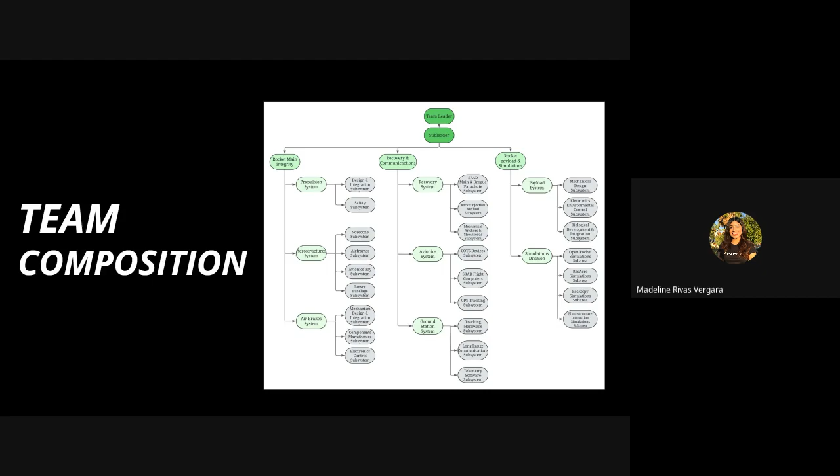Now I'm going to talk about team composition. First, team leader, followed by sub-leader, Miley. Our team is composed of three principal divisions: rocket main integrity, rocket recovery and communications, and simulations and payload.

Each division has three areas. Rocket main integrity has propulsion system, aerostructure system, and air brakes system. Recovery and communications has recovery system, avionics system, and ground station system. Finally, simulations and payload has payload system and simulations division. Each one has their own subdivisions. Next slide, please.

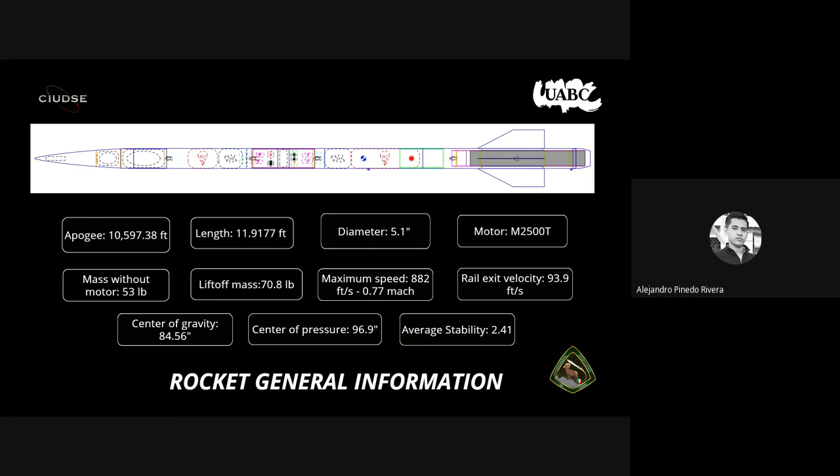There is some general data about our rocket, like the apogee, length, diameter, motor, mass without motor, liftoff mass, maximum speed, rail exit velocity, center of gravity, center of pressure, and average stability. This is the level of stability—I made a mistake. If you have any questions, Jimmy, you can tell me at any moment. Next, please.

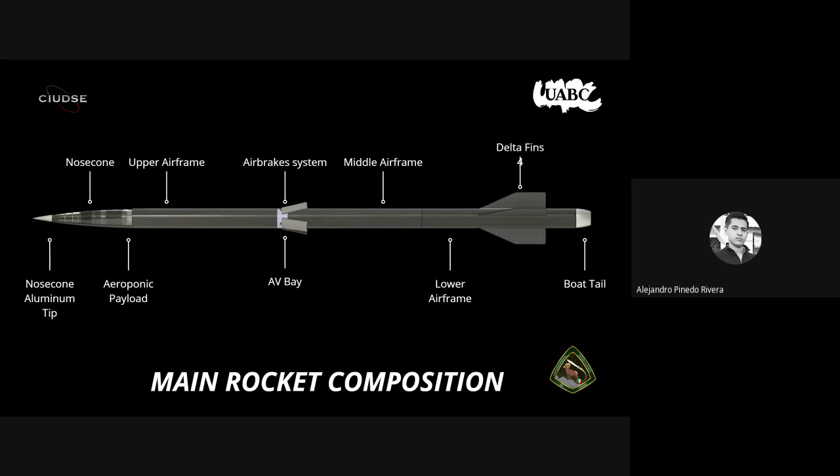We have the main rocket composition. First we start with an aluminum tip, followed by nose cone, the payload, the upper airframe, the airbrake system, the avionics bay, the middle airframe, lower airframe, our fin configuration, and finally the boat tail. Next, please.

Now we move on to the nose cone. Good afternoon, my name is Anna, and I'm the nose cone leader. Next slide, please.

Some general specifications of the nose cone: our rocket's nose cone has two functions. The first is to serve as an aerodynamic enclosure that holds the air during forward motion. Its secondary function is to serve as a compartment for the payload, protecting and storing it. Its mission is to endure aerodynamic forces during flight, and its type is an LD Haack ogive.

Next slide, please. The nose cone has 6 components, starting with the tip, made of aluminum 6061-T6 with an M36x4 thread. Inside we have the tip coupler, also aluminum 6061-T6, with an M36x4 thread on the interior. Then we continue with the nose cone structure, which is a composite lamination of carbon fiber and fiberglass.

We continue with the shoulder, which is exclusively fiberglass. Then we proceed with the bulkplate, made of aluminum 6061-T6, half an inch thick. We use 6 M4x0.7 fasteners, and finally we have the half-inch eye bolt.

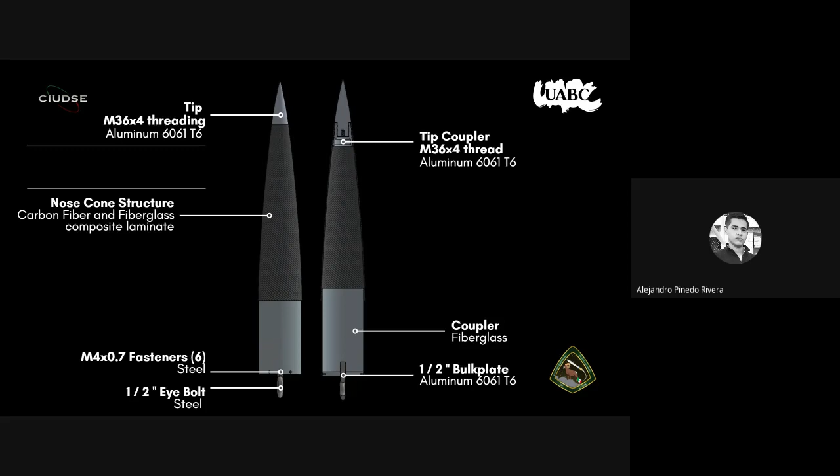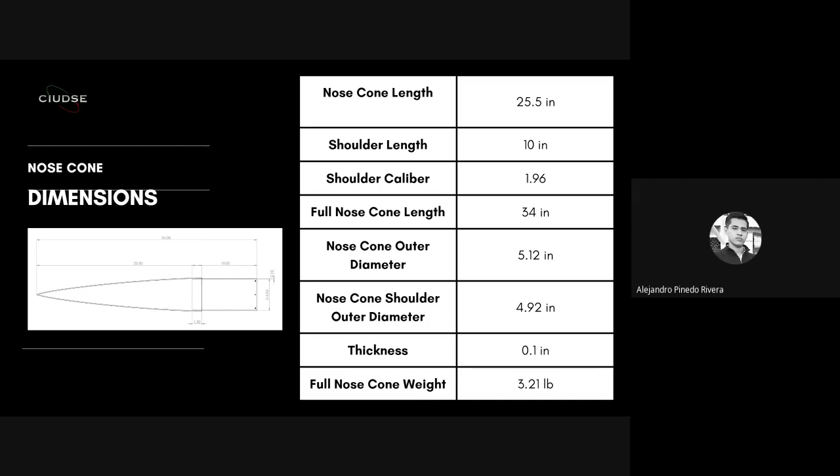Next slide, please. For the dimensions, we have a nose cone length of 25.5 inches and a shoulder length of 10 inches. However, out of those 10 inches, 1.5 inches of the shoulder length goes inside of the nose cone. In total we have a 34-inch length. The shoulder caliber is 1.96.

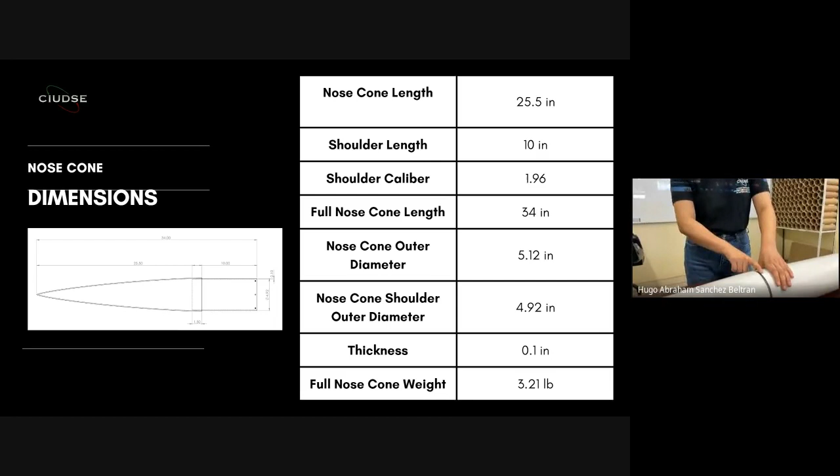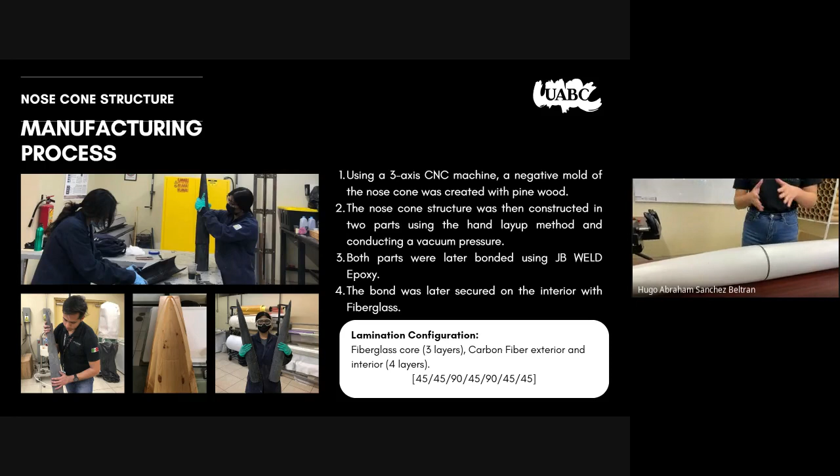Next slide, please. For the manufacturing process of the nose cone structure, we use a 3-axis CNC machine to create a mold with pine wood. Once we had the mold, we proceeded with the construction of the structure using the hand layup method and performing a vacuum process. Once we obtained both parts of the nose cone structure, we used a JB Weld epoxy to join the parts, and finally we used 1 layer of fiberglass to join both parts. For the nose cone area, this will be it.

Thank you. Okay, hi, good afternoon, my name is Leonardo. I am the leader of the airframes. I will tell you the important aspects of each one.

Our rocket is made up of the upper, middle, and lower airframes. The next 3 airframes have the same measurements: 5.12 inches outer diameter, 4.92 inches inner diameter, 0.098 inches thickness. In a moment I will mention the length and weight of the airframes. I'll start with the upper airframe: 37 inches length and approximately 3.84 pounds weight.

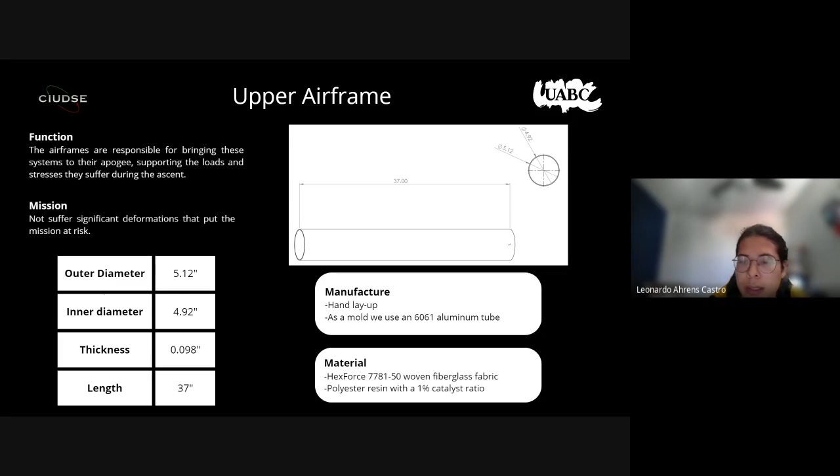HexForce 7781-50 woven fiberglass fabric is used to manufacture the upper part of the airframes. This fiber was chosen due to the need to not interfere with the avionics communication with the ground station during flight, as carbon fiber would do. We chose to use polyester resin with a proportion of 1% catalyst for our structure. The manufacturing technique for this component is hand layup. Next slide, please.

The second airframe is the middle, bound at 34.25 inches length and approximately 3.55 pounds weight. Carbon fiber filament and epoxy resin were used due to their excellent mechanical properties.

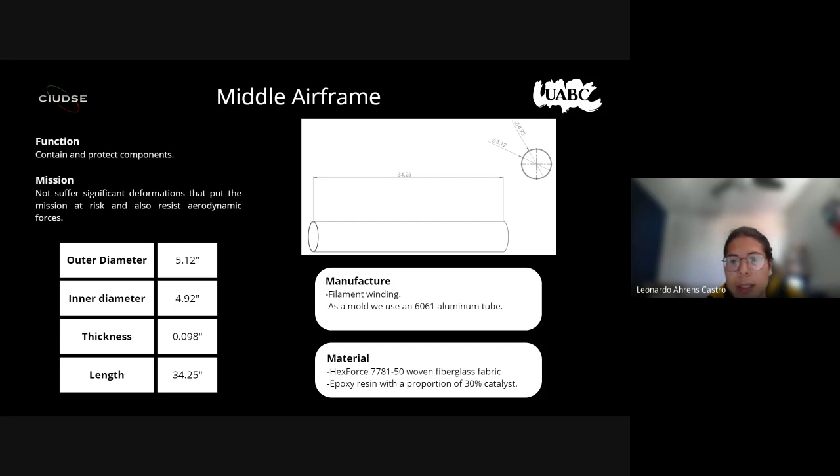Next slide please. On this occasion, we decided to implement a new manufacturing method called filament winding. Filament winding is a manufacturing technique for creating composite material structures. The process consists of winding a tensioned filament impregnated with resin around a cylindrical mold. This new manufacturing method was used to make both the middle airframe and the lower airframe.

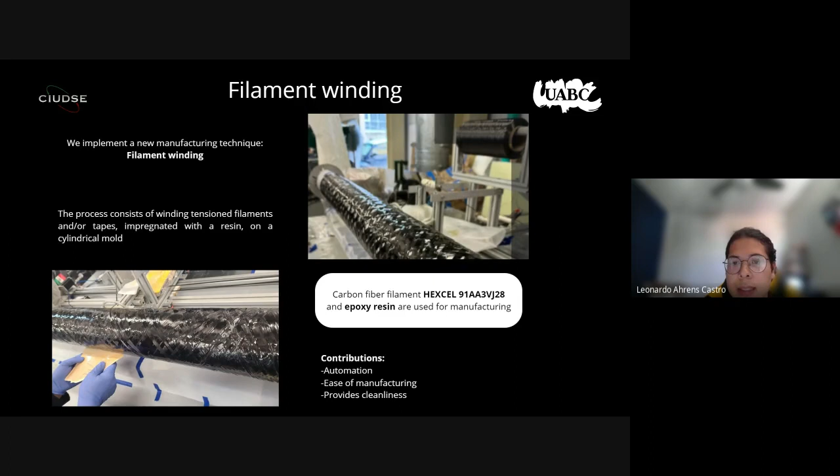Next slide please. To finish, it counts at 39.37 inches length and approximately 4.085 pounds weight. The lower airframe was manufactured by the filament winding technique using carbon fiber and epoxy resin with a proportion of 30% catalyst. On the other hand, we use two large Delrin 1515 rail buttons.

One is located in the middle airframe, where the center of gravity is located. The second is located in the lower airframe, between the fin and the boat tail. These rails will allow the rocket to be inserted into the launch base. These two rails are on different airframes to ensure they are centered on the launch base, and we will use the mark on the two airframes.

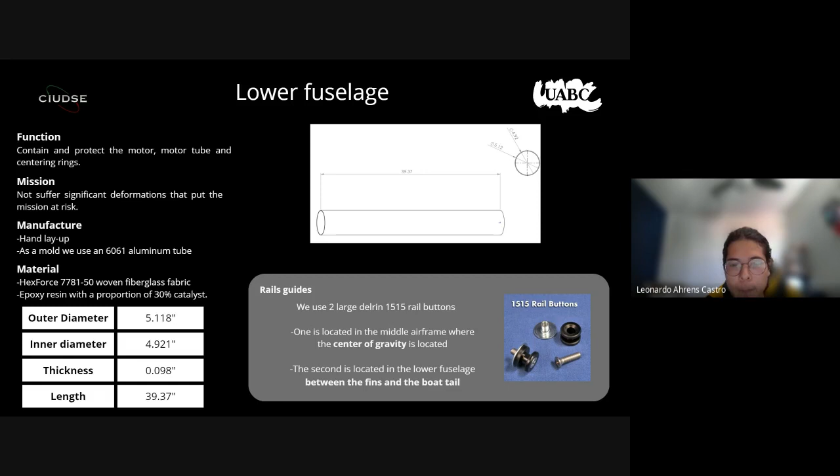Okay, so next up we've got payload. If you could help me with the next slide please. Here we're going to talk about the mission objective in an overall manner.

We see our project as a feat of modern biotechnology by carrying an herbaceous plant in the payload of the rocket, withstanding extreme temperatures, acceleration forces, and the microgravity of space. Our intelligent capsule ensures the survival of the crop throughout its journey, with three phases, our system controls covering all vital aspects, from nutrient supply to adaptation to the space environment and real-time monitoring. The electronic control system ensures our crop is always in optimal condition, even in the most hostile environments.

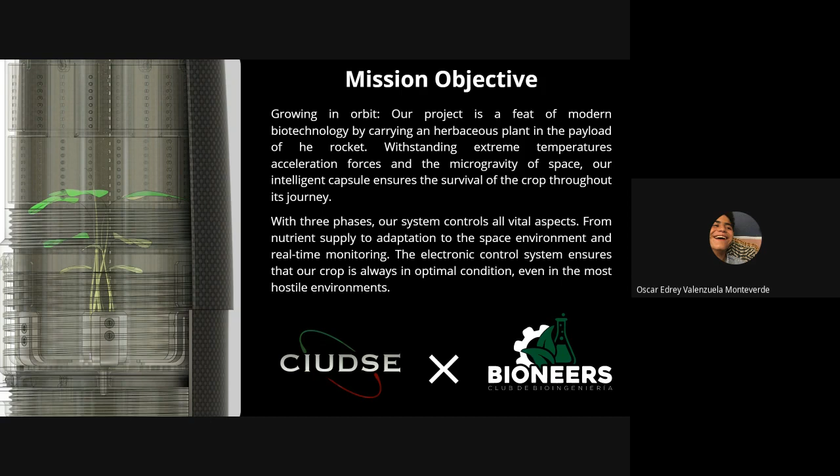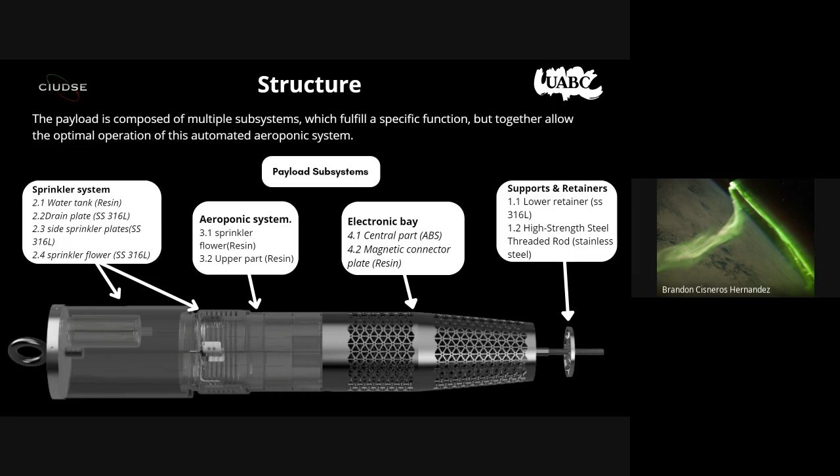Next slide. The payload is composed of multiple subsystems which fulfill a specific function, but together allow the optimal operation of the automated aeroponic system. I will mention below a general description of each subsystem present in the payload.

The sprinkler system, this subsystem is necessary and has the necessary parts for the operation of the aeroponic system, and is made of the following parts. Water tank, this will be made with resin, and drain plate. The material for the parts is indicated on the right side of the name. In this case, for the drain plate, the abbreviation in the material is for stainless steel.

The next part is the sprinkler flower, and the other subsystem is the electronic bay. This space will contain the electronic system necessary for the optimal functioning of the aeroponic system, including switches, microcontroller, batteries, and sensors.

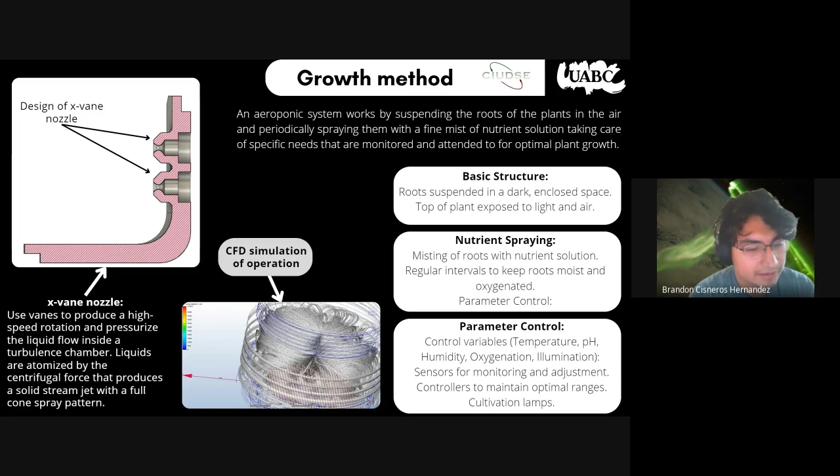For the plant, we choose the microgreens. Microgreens are young sprouts of vegetable plants and herbs like radish, lettuce, and broccoli, and they contain a lot of nutrients, vitamins, and amino acids, and help to cleanse the body.

As an advantage, the microgreens can be eaten completely, so we don't have to worry about residues in the space. The growth timeline is shorter than other plants, taking 7 to 15 days to grow. They consume minimum water and won't need fertilizer, so you don't have to take care of that part, and they're perfect for small places.

As we can see, the system is really small, so we want to grow plants that contain a lot of nutrients and vitamins in small places, so this is perfect for us.

For the disadvantages, it requires time and constant attention. We have to supervise the pH and the nutrients in the water solution.

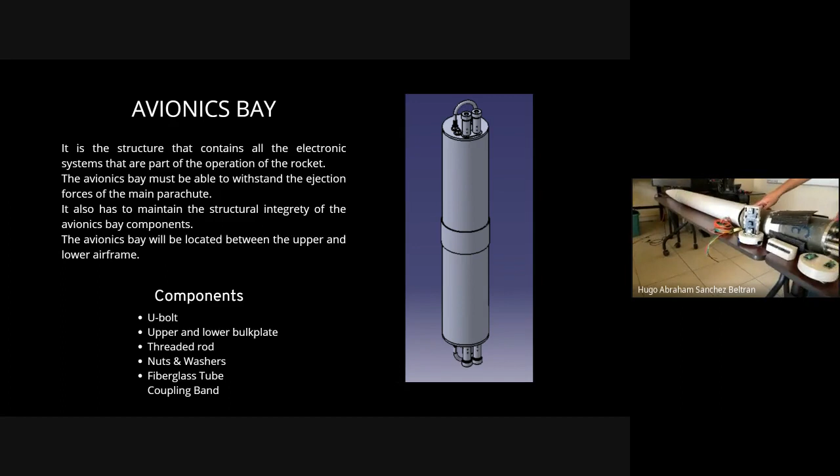Here we have our avionics bay. It's composed of a coupler and a band of airframe, both the lower and upper plates. Here is the recovery ejection system, the CD3 system, as you can see.

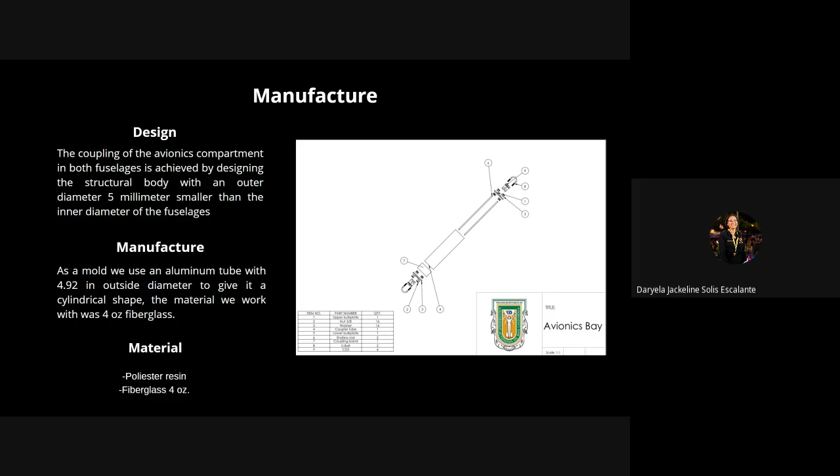Here is the manufacture side. It's composed of fiberglass avionics plate with polyester resin. The outside diameter is 4.92.

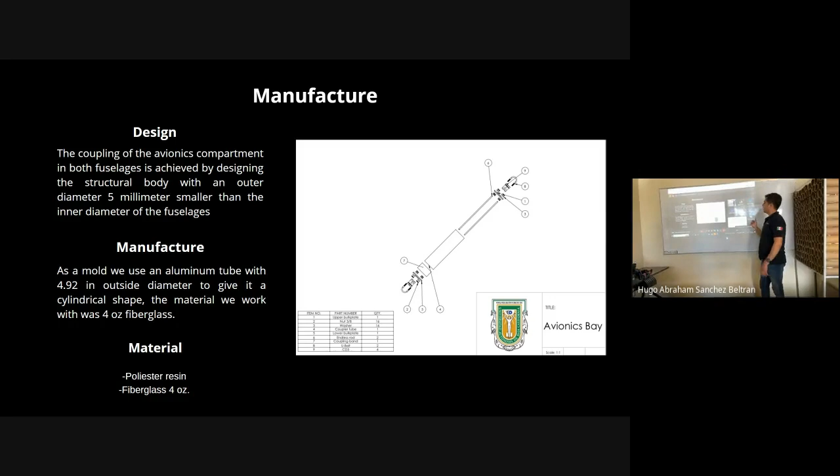Here are the dimensions of the fiberglass, the band, and the bolt plates. The coupler, the avionics plate, has 1.3 times the diameter of the rocket, which is the length of the dimensions required by ESRA. That means we can accomplish the length required by ESRA.

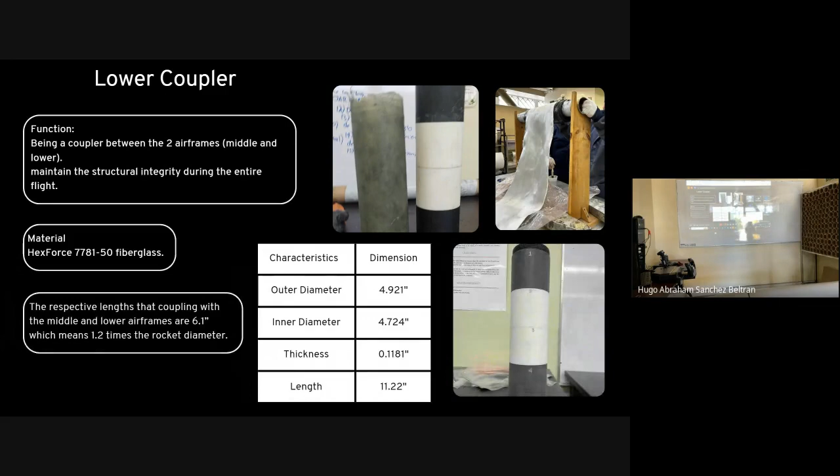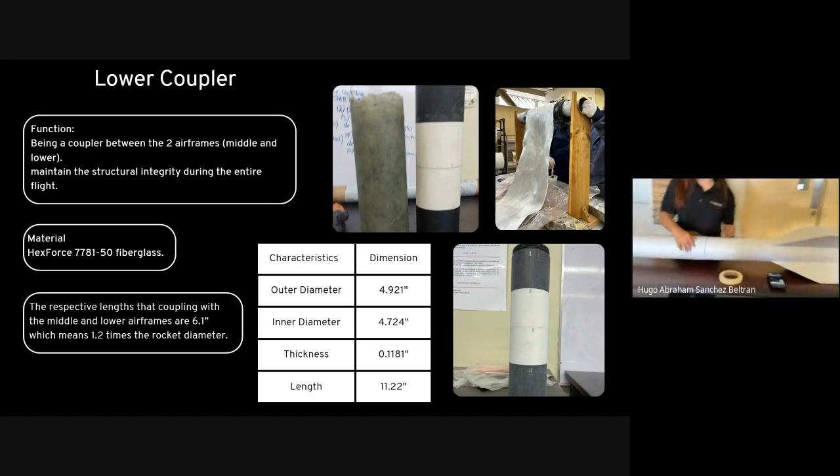Next, the lower airframe. Now we are going to present the lower fuselage. First is the coupler, the lower coupler.

It was made of fiberglass, HexForce 7781-50 fiberglass, and the respective length of the coupler is 6.1 inches, which means 1.2 times the diameter of the lower fuselage. We glue them with JB Weld in this part.

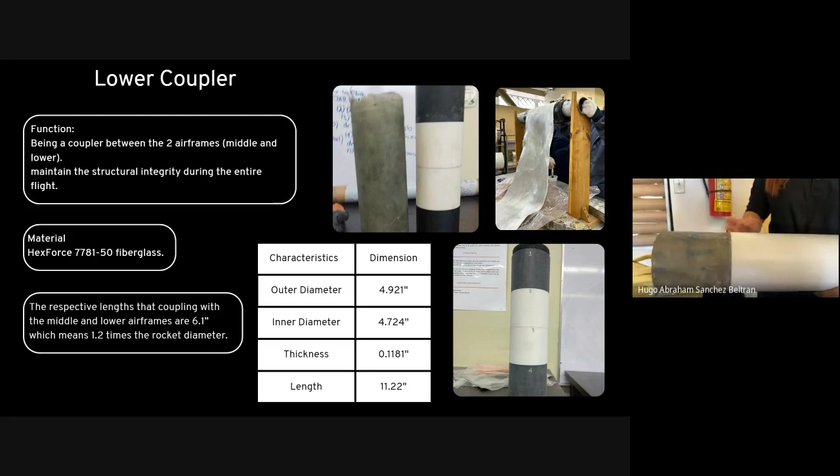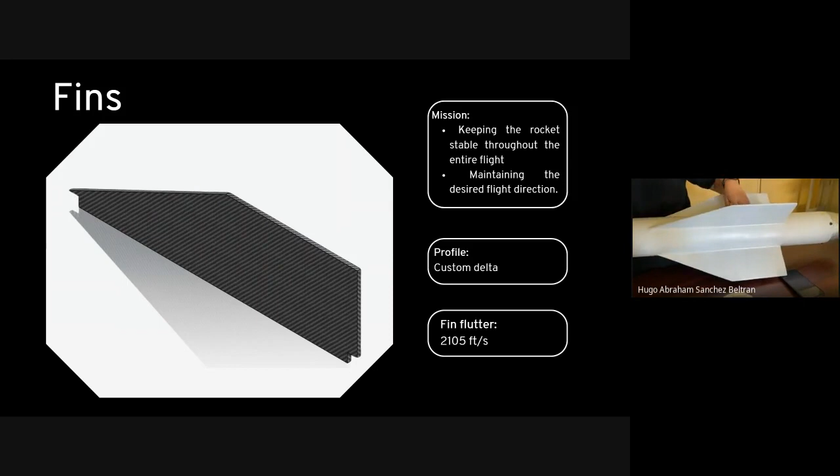Now we have the fins. The profile is a custom delta, and the fin flutter is 2,105 feet per second.

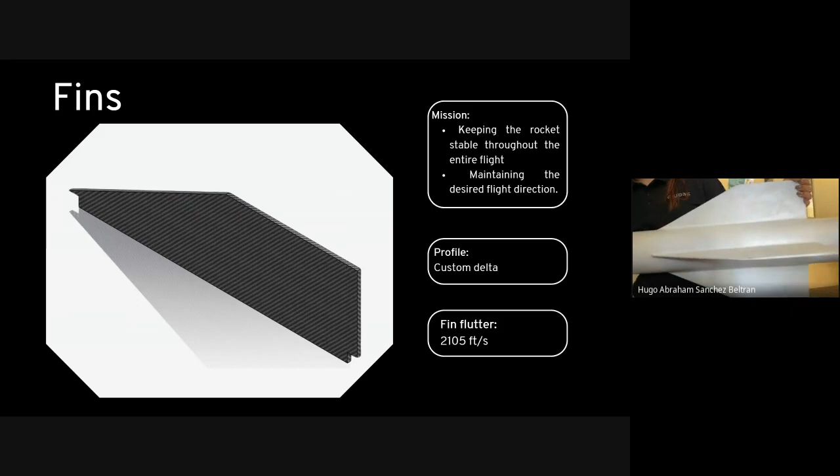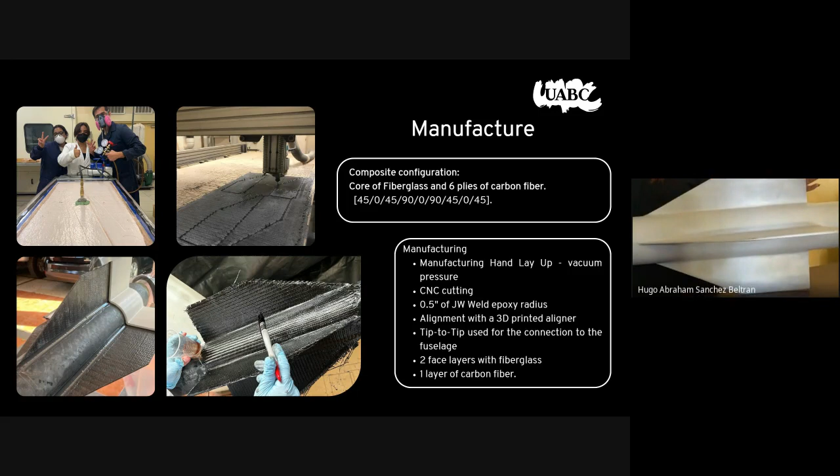The manufacturing was a hand layup with vacuum pressure, and the cutting of the fins was done in a CNC machine. We use JB Weld epoxy to attach them to the fuselage, using the tip-to-tip method to join and connect the fins to the lower fuselage. We use layers of fiberglass and one final layer of carbon fiber. As you can see in the image, we use a 3D printed aligner to align the fins.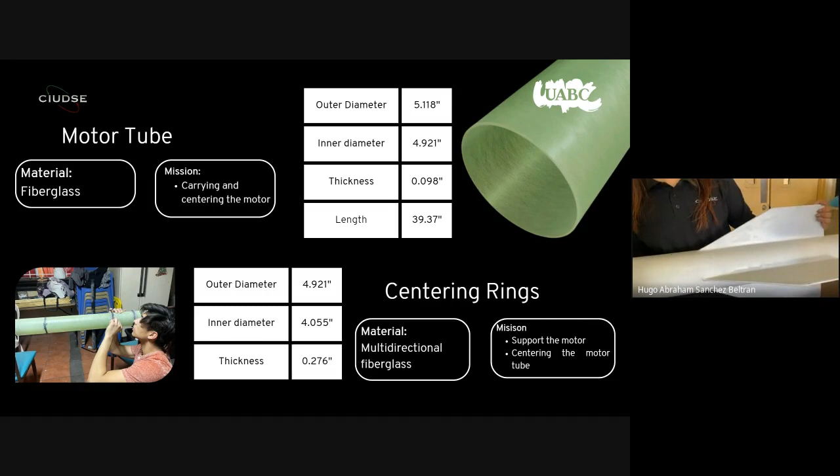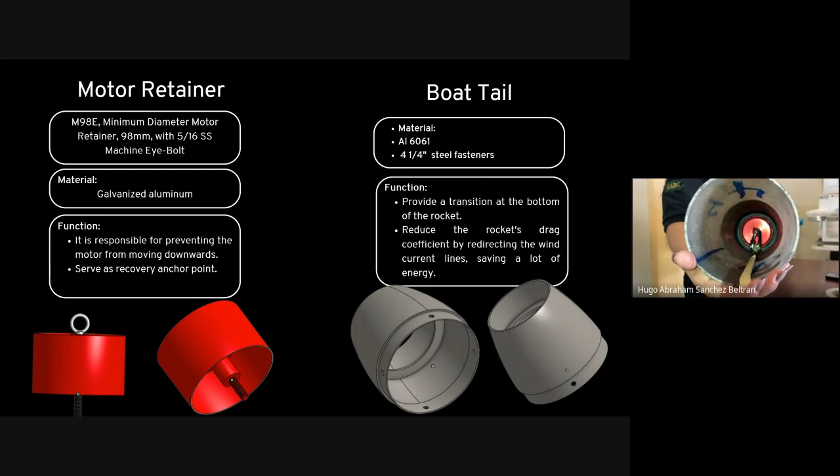Finally, we have the motor retainer and the boat tail. The motor retainer is for a minimum diameter motor. We glue them with JB Weld epoxy, the red one. And then we have the boat tail.

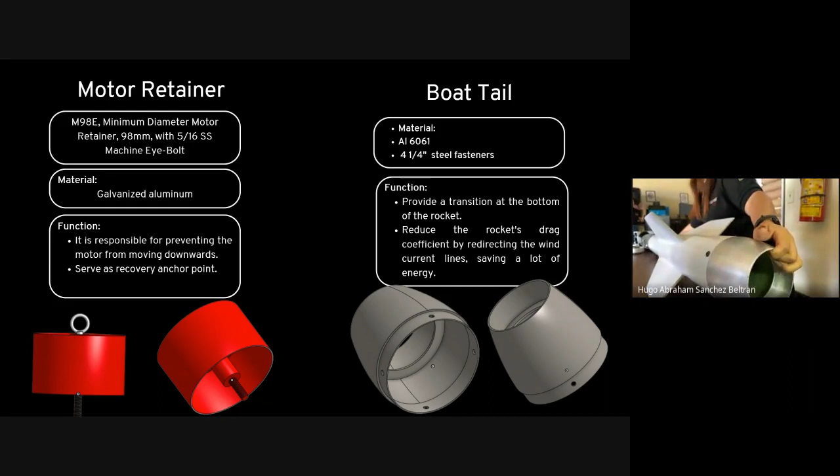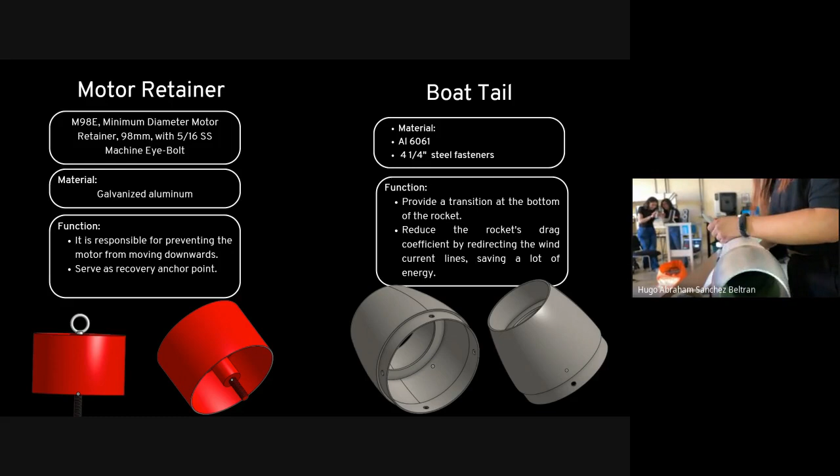Finally, here is the boat tail. It was machined in aluminum 6061, and we attach it with four fasteners.

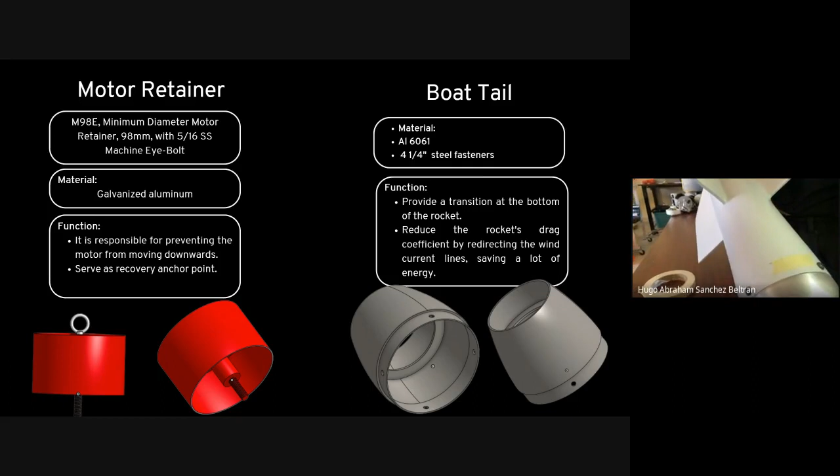The propulsion system we have chosen is an Aerotech M2500T-PS RMS 98/10-240 CUTS rocket engine. We chose this motor because it has the thrust and speed needed to lift the rocket to 11,156 feet, which means 11.2% extra altitude in order to have tolerance for the air brakes applications.

The motor hardware consists of retaining nozzle, casing, retaining forward closure, and forward closure. Its function is to produce thrust by the expulsion of gases at high pressure, giving movement to the rocket. This motor uses Blue Thunder propellant.

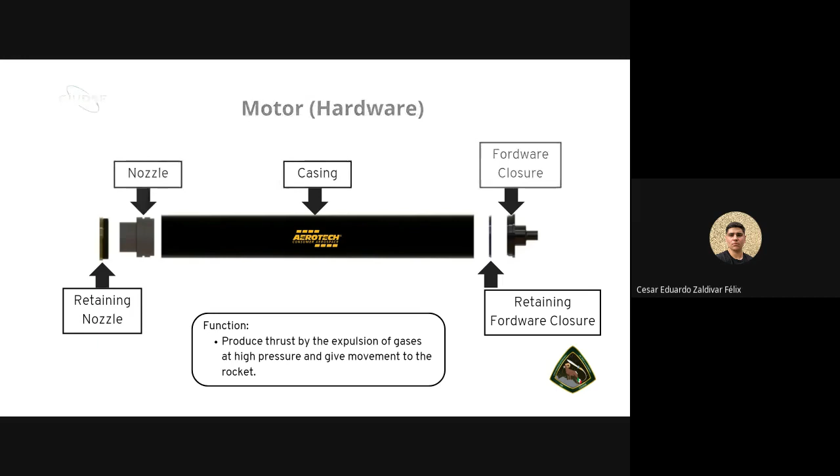This motor consists of casing specifications and propellant specifications. The model is RMS 98/10240. The length is 27.94 inches, external diameter is 3.87 inches, and weight is 5.4 pounds.

The propellant specifications: the initial thrust is 2,577.9 newtons, the total impulse is 9,671.0 newton-seconds, the max thrust is 3,710.9 newtons, the ISP is 209 seconds, the burn time is 3.9 seconds, and the propellant is Blue Thunder.

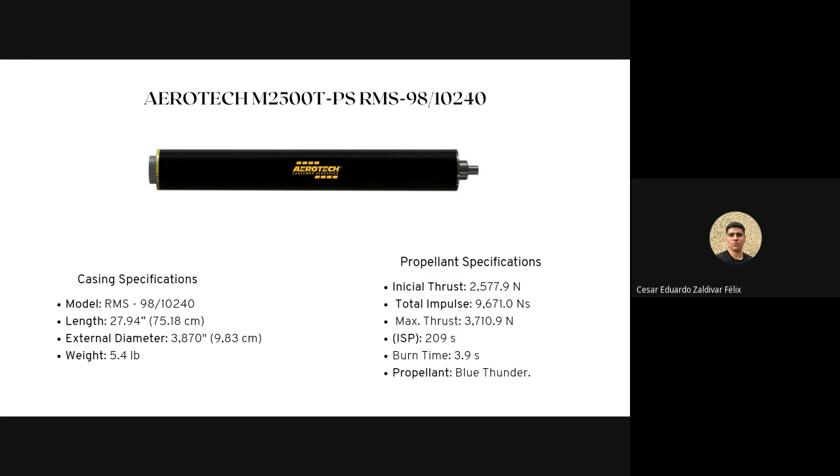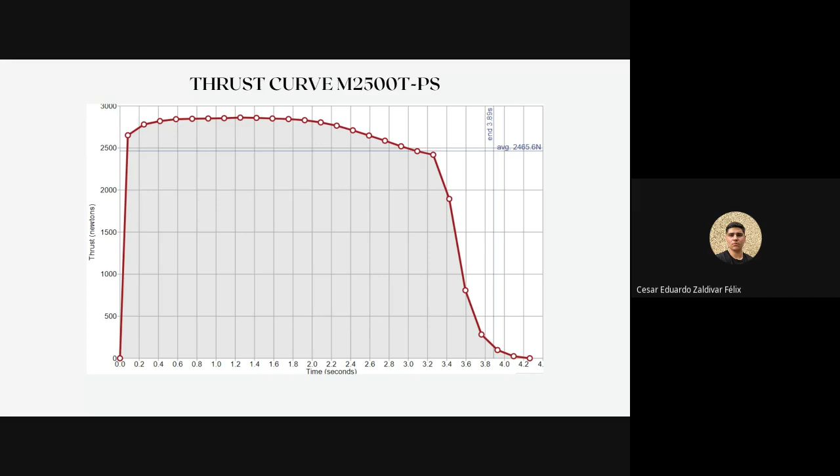Next slide please. This is the thrust curve graphic. The vertical line shows the thrust in newtons, and the horizontal line shows the time in seconds. And that's it.

For this mission, the main altimeter chosen carefully was the Altus Metrum EasyMini, which is a dual deployment altimeter, has a 9-volt alkaline battery to power its components, and comes in handy with its mini USB function for retrieving information afterwards in the mission.

For redundancy and security, we also chose the MissileWorks RRC2, which is also a dual deployment altimeter, has the really important feature of power shortage protection, and is also powered by a 9-volt alkaline battery.

For our switches, we need a way to power on and off our components, both for safety and power maximization. That's why we chose the small Omron SS5GL relay switches, an arrangement of 4 switches that will form a larger pin type switch.

It's important to notice that these altimeters are all set to deploy at apogee and 1,250 feet above ground level. Next slide, please.

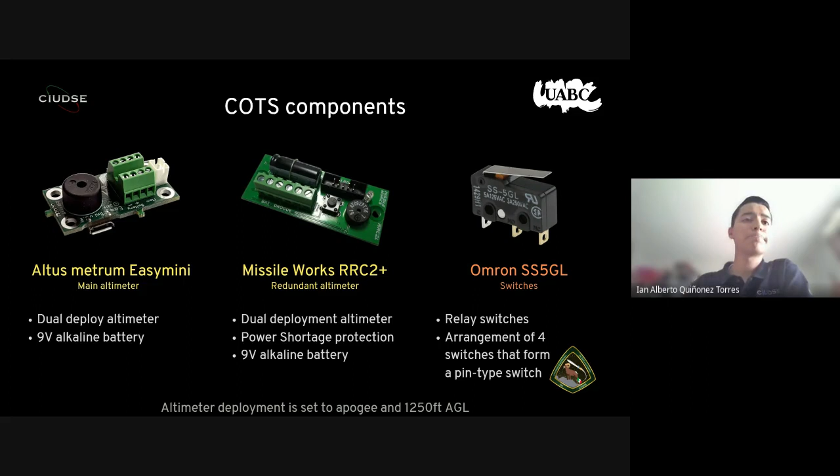This year we developed two multifunction flight computers that accomplish both altimeter and navigation tasks. SRAD-A, the main computer with the most features, is a dual deployment altimeter with air brake control authority, GPS, orientation, and acceleration data collection and transmission via long range 915 megahertz. It's powered by two 9-volt alkaline batteries, one powering the microcontroller and the other powering the E-match.

SRAD-B is a mirror of the SRAD-A, with the removal of the altimeter and air brake authority functions. It's also a GPS, orientation, and acceleration collector and transmitter with long range 915 megahertz data, powered by a single 9-volt alkaline battery. It's important to note that the SRAD-A altimeter function is also set to apogee and 1,250 feet above ground level.

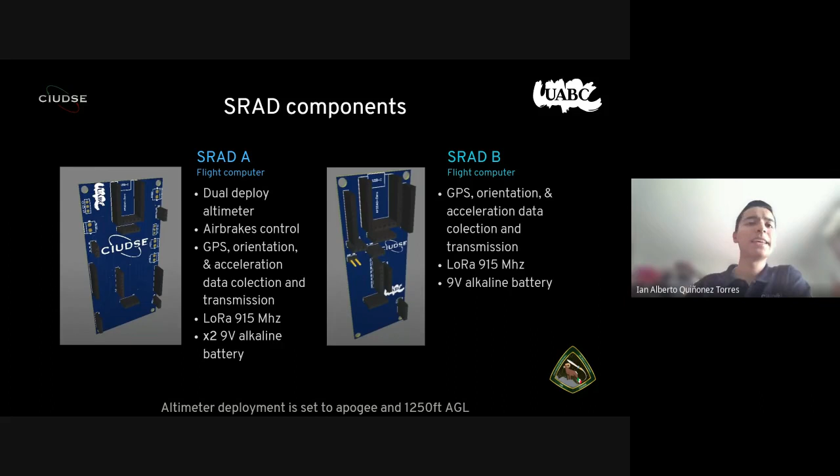Here we have the wiring diagram for the Cimarron avionics, where we can appreciate the connection between components assisted by color symbology. For example, red lines stand for positive connections, black stands for ground or neutral conductors, yellow stands for signal connections, and the purple dotted lines for wireless connection.

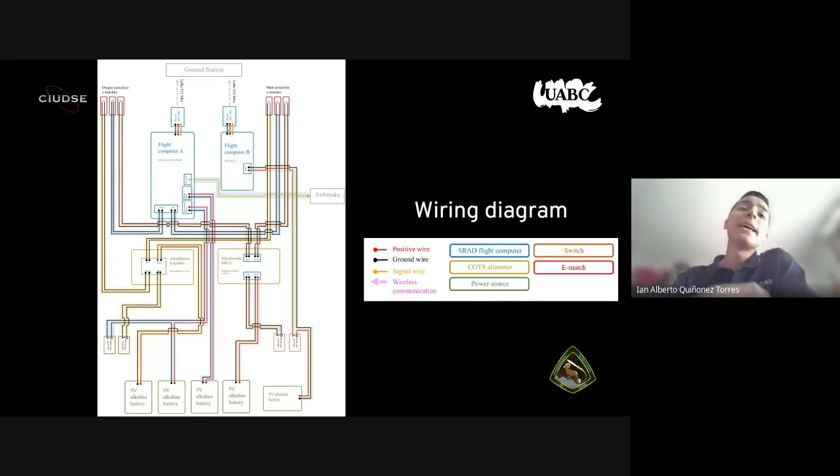There are also boxes that we can see. Blue stands for the SRAD flight computers, yellow for the COTS altimeters, green, which in this case are all 9-volt alkaline batteries, is the power source, orange will be switches, and red for E-matches.

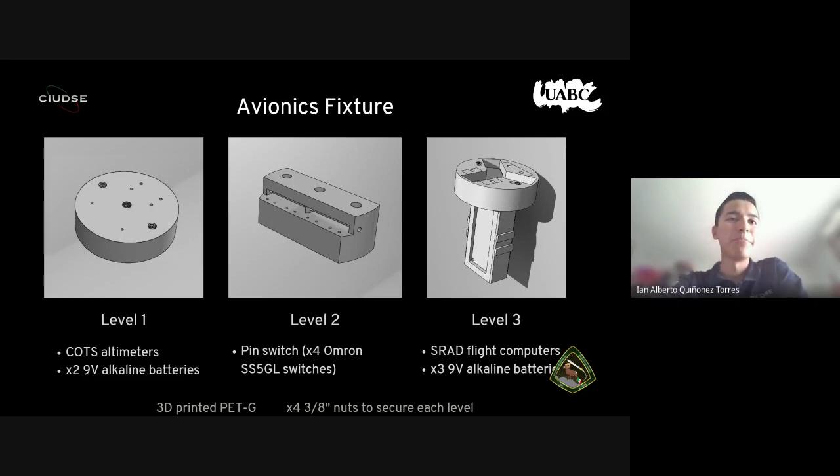First, our goal is to design a system to monitor the mission status of our rocket. To achieve this, we need a highly reliable ground station system that maintains the communication link so we can continue with our mission. On the right, you can see a diagram of the data received at the ground station from the rocket. This includes information from the avionics flight computers as well as payload.

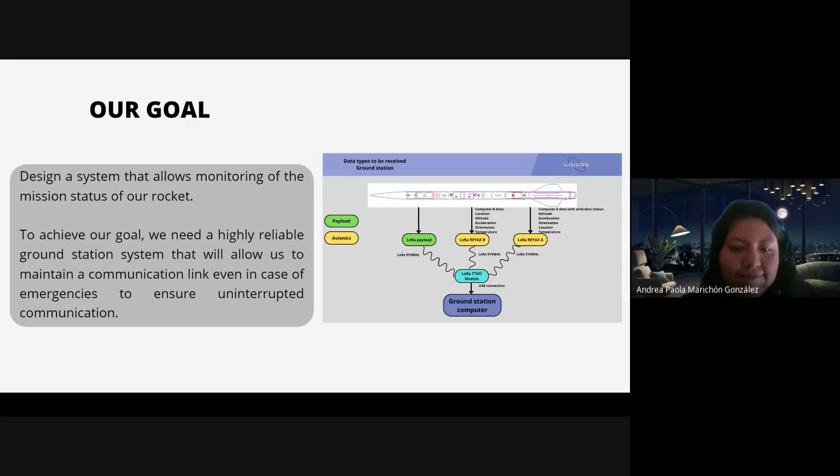Here we see a diagram of the components used in the ground station. We have an external antenna that offers higher signal gain connected to a single board that contains a LoRa module, which is connected via micro USB to the ground station computer. Additionally, we have a power bank to ensure power supply to our computer during the mission.

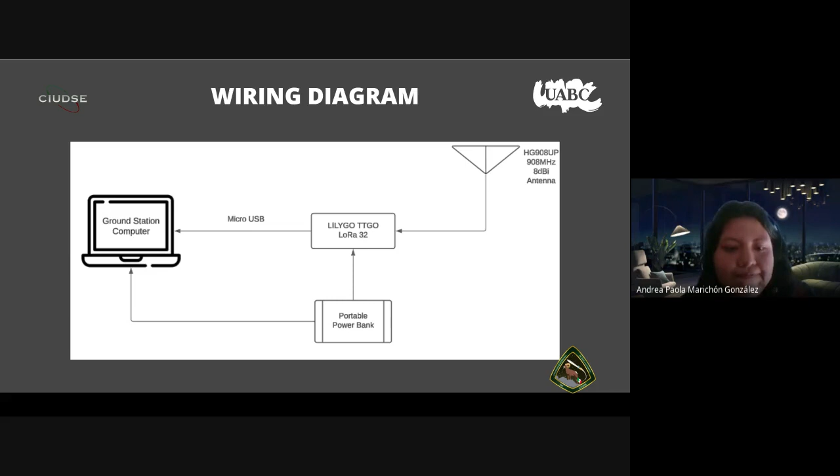For data reception, we use the LilyGo TTGO LoRa32. This is a commercial single board with an ESP32 microcontroller and an integrated LoRa module. This helps us maintain a functional and reliable system, reducing potential points of failure compared to using individual components. The data is received via LoRa at 915 megahertz frequency.

The data received from the rocket includes GPS, altitude, gyro, acceleration, temperature, pressure, and real altitude. And as I mentioned before, we use an external antenna for higher signal gain.

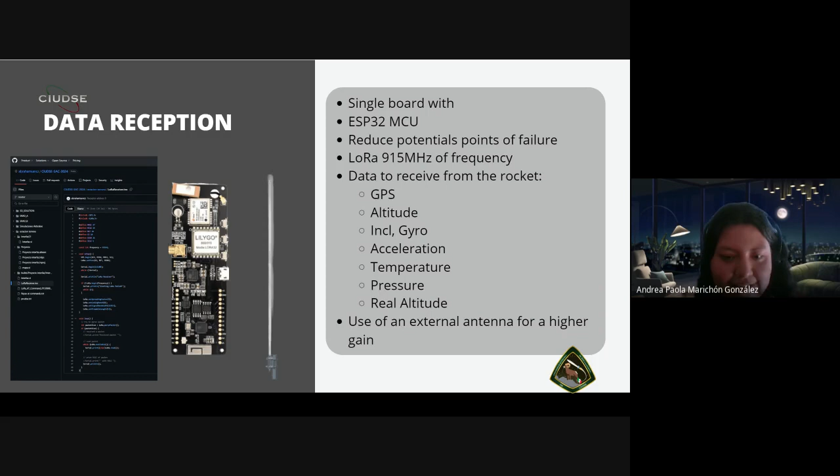And we have a graphic interface. This graphic interface was made in LabVIEW, and we chose LabVIEW for its user-friendly visualization system. A key feature of this interface is that it includes an input text box, which displays the data in a concatenated string, and we have point values that show latitude, longitude, and number of detected satellites.

We also have a graph with plotted values that show data from the accelerometer, gyroscope, barometer, temperature, altitude, and so on. With this, we ensure easy interpretation of all the data received, allowing us to quickly understand it. We also have the option to save all the data to a selected text file.

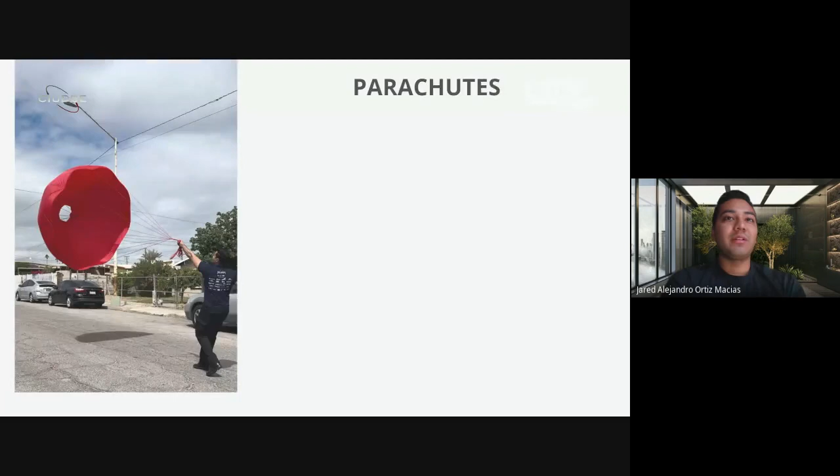First, parachutes. The parachutes we are going to use in the competition are homemade, with ripstop nylon fabric and paracord for the ropes. The drogue parachute has a diameter of 36 inches, a descent speed of 68.75 feet per second. Its deployment is at apogee, and the parachute is green.

The main parachute has a diameter of 86 inches, a descent rate of 20.08 feet per second. Its deployment is planned at 1,250 feet, and the color of the parachute is red. Both parachutes have a spill hole to increase the stability of the descent. The spill hole we made has a 50% ratio to the diameter of each parachute.

Also, the parachutes will be protected by 9-inch Nomex fabric during the flight of the rocket. In the slide, we can see the main parachute.

Now, talking about the deployment system, a CO2 cartridge system will be used, activated by a CD3 system. For primary and redundant charge, 25 grams of CO2 are being used. In total, 4 CO2 cartridges will be used during the flight.

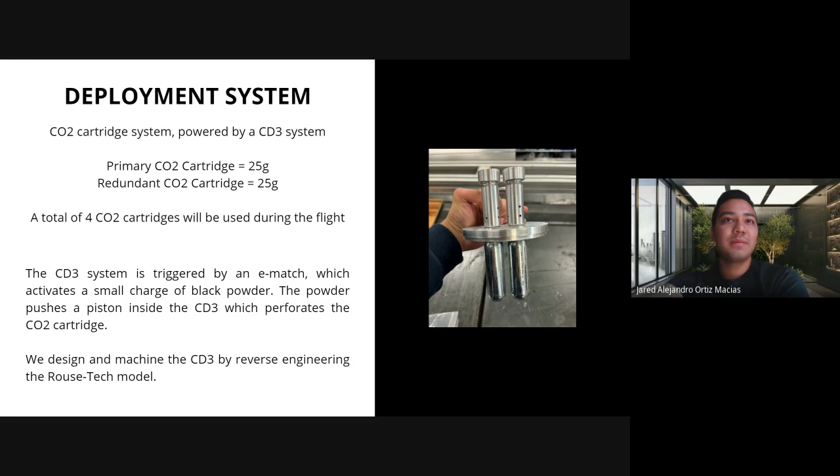Now, the shock cords. The shock cords we're going to use in the competition are half-inch tubular Kevlar, which have a resistance of 6,000 pounds force.

Cord B is 36 feet long, and the B1 side connects from the avionics bay to the main parachute, while the B2 side connects from the main parachute to the middle lower fuselage.

Now, talking about the mechanical links, we are going to use 3 eighth-inch steel quick links, which have a load limit of 2,645 pounds force, while U-bolts and eye-bolts are used in the fuselage. The parachutes use a steel swivel in their connections.

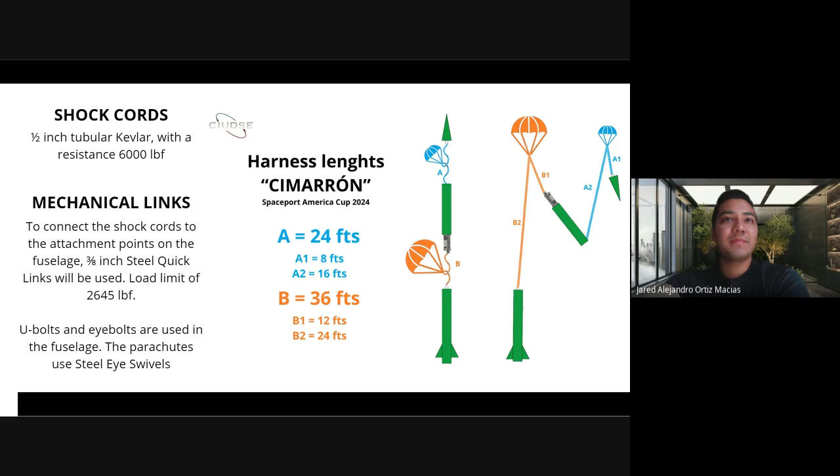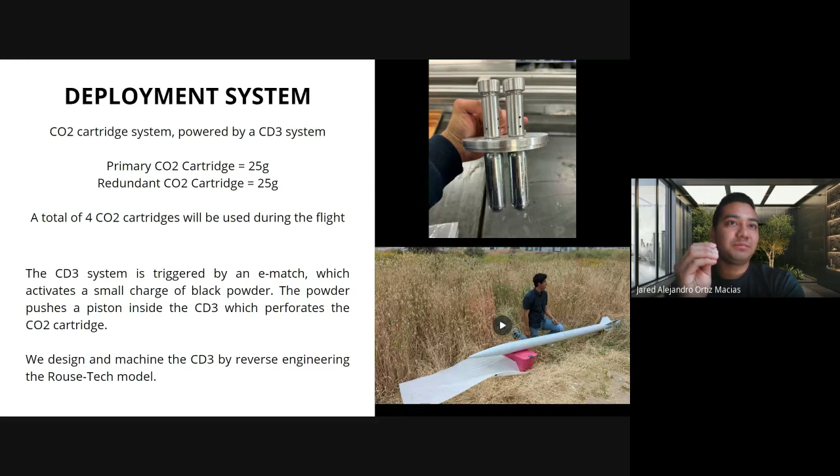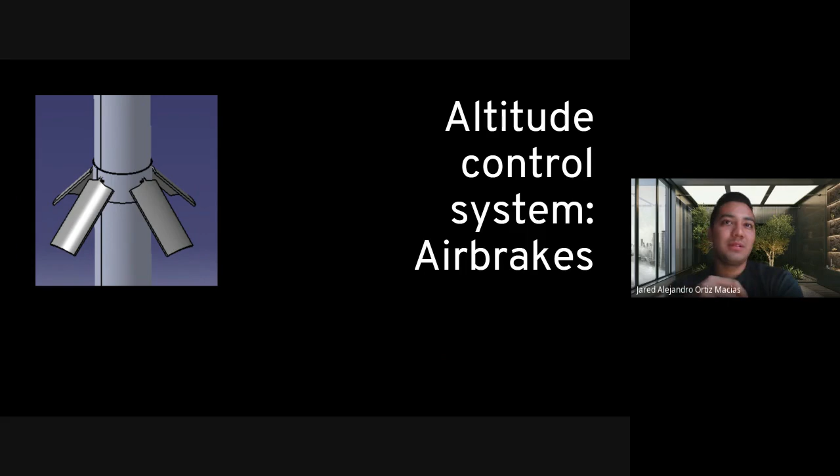The next slide. No, back. Well, can you come back?

Okay, yeah. Phase 4 is when the rocket reaches apogee with a simulated altitude of 11,256 feet, and the first recovery system is deployed here, the drogue parachute.

Phase 5 is when the drogue parachute descends, where it will descend at a rate of 68.75 feet per second. Phase 6 is when the rocket descends to an altitude of 1,250 feet.

At that altitude, the second recovery system, the main parachute, is deployed. At that moment, the speed of descent must be 20.08 feet per second. And now, in the last phase, the rocket descends to the ground, and we can do the rocket recovery.

Now, to finish, I'm going to talk about the shear pins. We are going to use nylon shear pins 4-40 with a length of half an inch to hold the fuselage together.

It is planned to use 3 shear pins per fuselage joint. And for the vent holes, 4 vent holes with a diameter of 1/4 inch will be used, 2 in the upper fuselage and 2 in the lower fuselage.

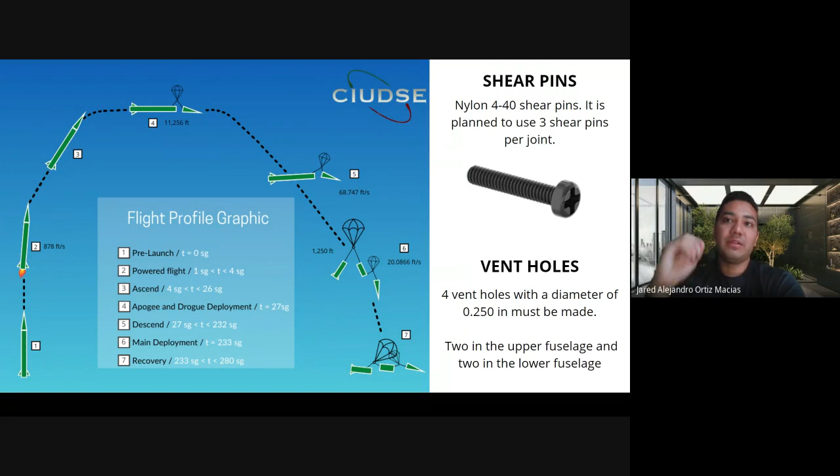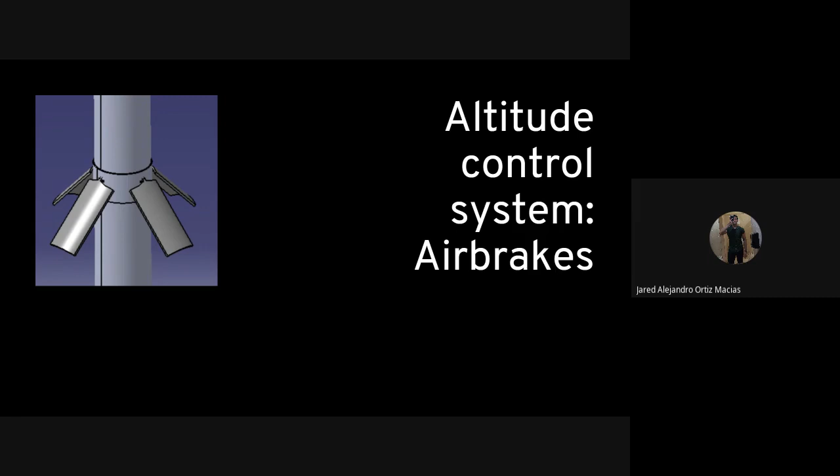Good afternoon. I'm Sebastian. I'm the air brakes area leader.

To start, the function of the air brake system is to generate drag, so we get closer to the goal of 10,000 feet above ground level.

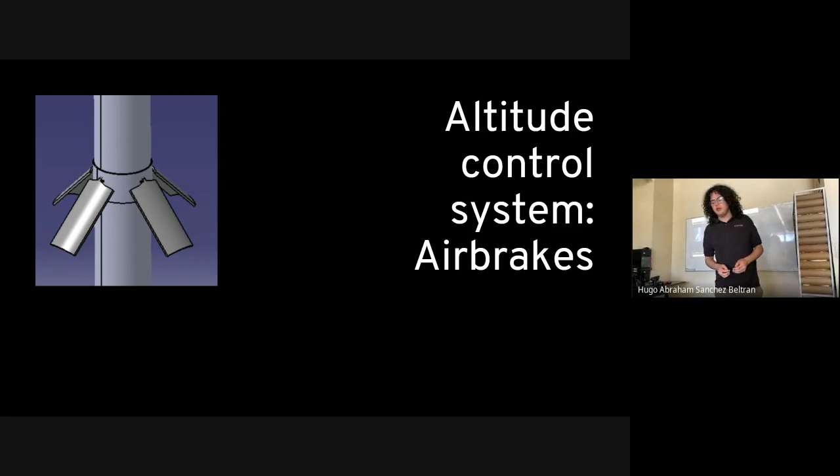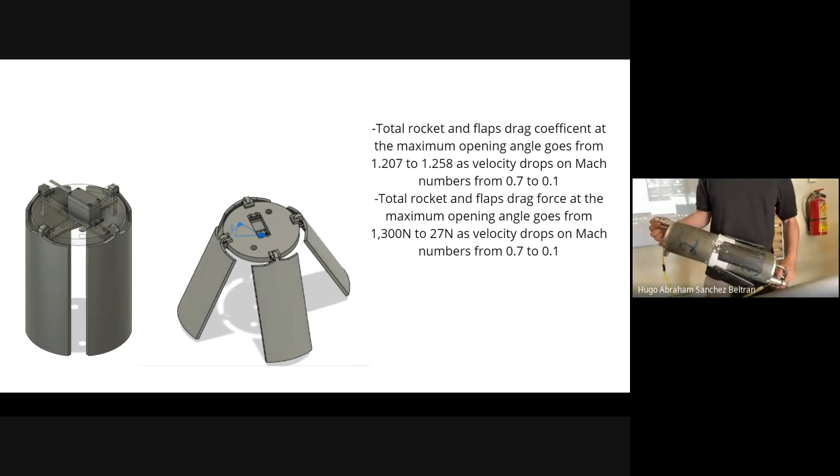The maximum angle of opening of the air brakes is 40 degrees. It generates a drag coefficient of 1.2 and generates a drag force of 1300 newtons down to 27 newtons as the Mach speed slows down.

The brake system opens at an altitude of 65% of the flight path, at an altitude of 6,500 feet.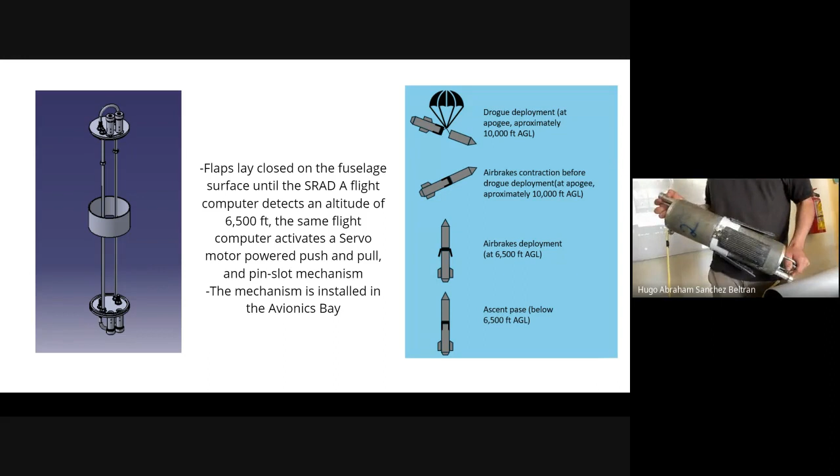Using this brake system, we're trying to get an apogee of 10,597 feet.

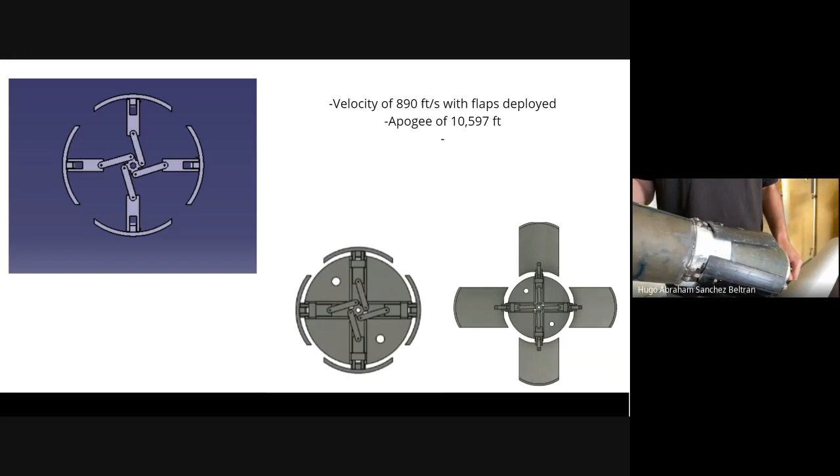The parts of the air brake are made as follows: the flaps, which are made of carbon fiber, and the core, which is made of fiberglass.

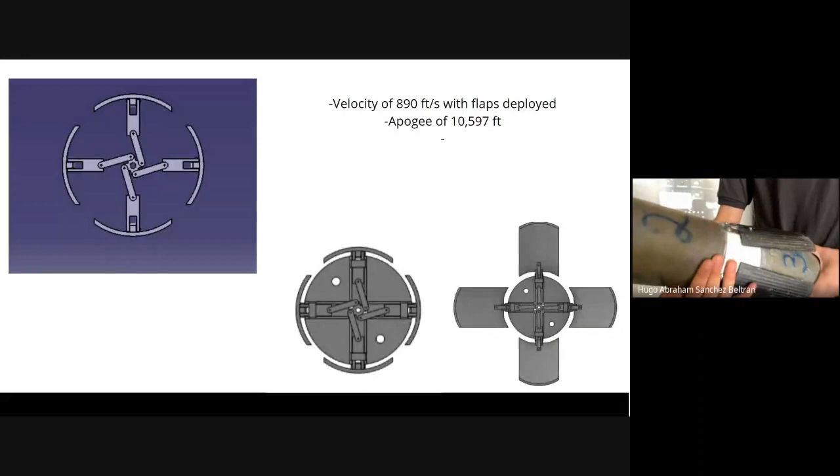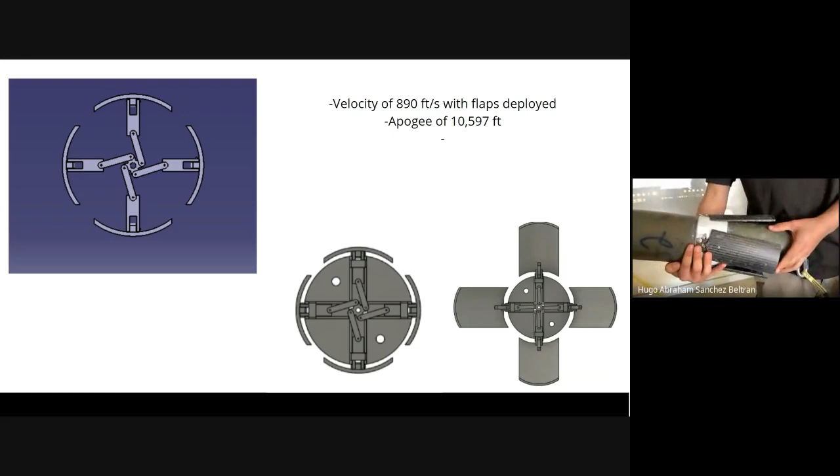The mechanism is a joint push-and-pull and pin-slot movement system. The mechanical parts are made of aluminum 7075. To cover the slots where the brakes are placed on the control band, we use some rubber coatings.

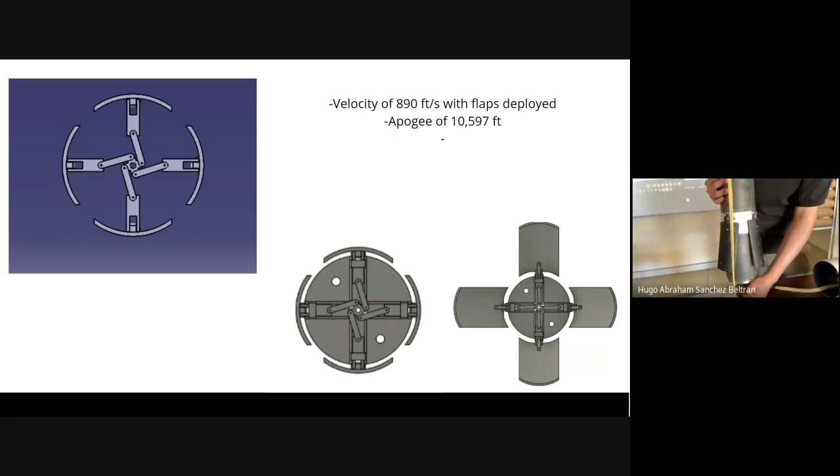Also, the brake system is attached to the avionics bay using the same three rods that the avionics bay structure is attached to.

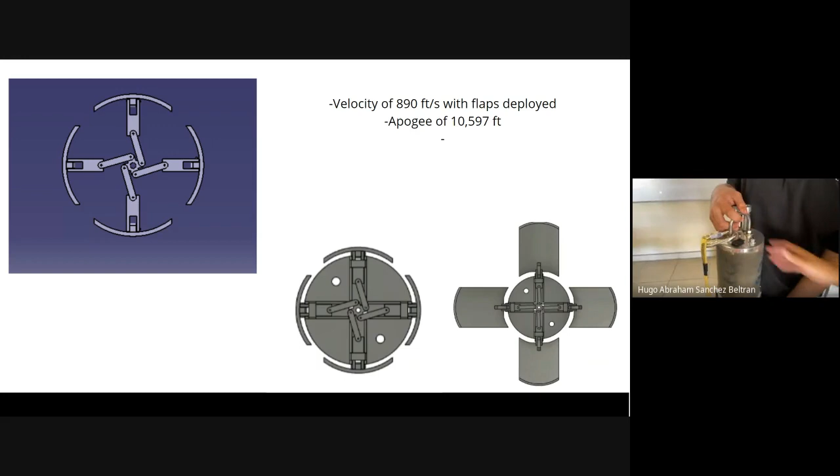Hi, I am Dalia and I am the simulations lead for this mission.

As you can see, the rocket was designed using OpenRocket, RASAero, and RocketPy, where simulations were conducted. Subsequently, all the obtained results were collected, including data on the rocket's performance, such as maximum velocity reached, maximum altitude reached, total flight time, flight stability, and other relevant parameters.

After gathering all the results from the simulations in OpenRocket, RASAero, and RocketPy, a detailed analysis of these results was carried out. This analysis focused on evaluating the rocket's performance in different key aspects, such as maximum velocity reached, maximum altitude reached, total flight time, flight stability, and additionally other relevant parameters that could influence overall performance, such as motor efficiency, aerodynamic resistance, and structural stability, were examined.

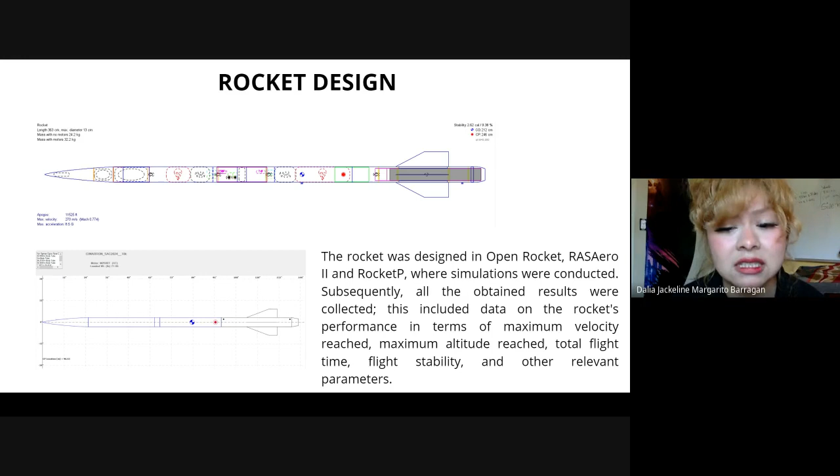The main objective of this results analysis was to identify areas for improvement in the rocket's design and simulated flight parameters. This analysis enabled informed decisions to be made to optimize the rocket design and maximize its efficiency and performance during flight. Next slide, please.

To achieve maximum redundancy in simulation with integrated air brakes, it is necessary to use the Python library called RocketPy, which specializes in high precision simulations up to the apogee.

To conduct the simulations, various parameters needed to be added. These include launch conditions, the type of engine to be used, and the structural specifications of the rocket. The purpose of including these details is to ensure that the program takes into account each component of the rocket, enabling us to obtain more accurate and realistic results.

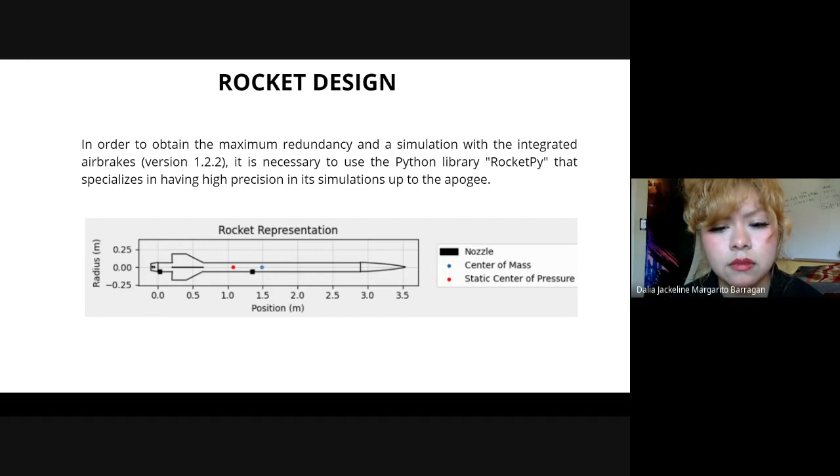Next slide, please. As you can see, the following table shows the drag coefficients obtained during ANSYS Fluent based on the Mach number per opening angle of the air brakes.

A previously calculated maximum opening angle of 40 degrees is used, and the air brakes are deployed when the rocket exceeds 6,500 feet. Additionally, you can see the different pressure and velocity contours obtained directly from the ANSYS program, where you can appreciate the different angles applied to obtain the parameters needed to complete the RocketPy simulations.

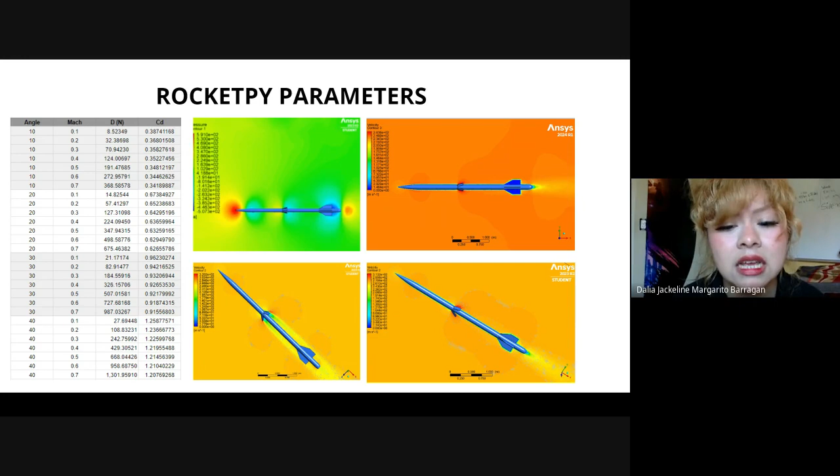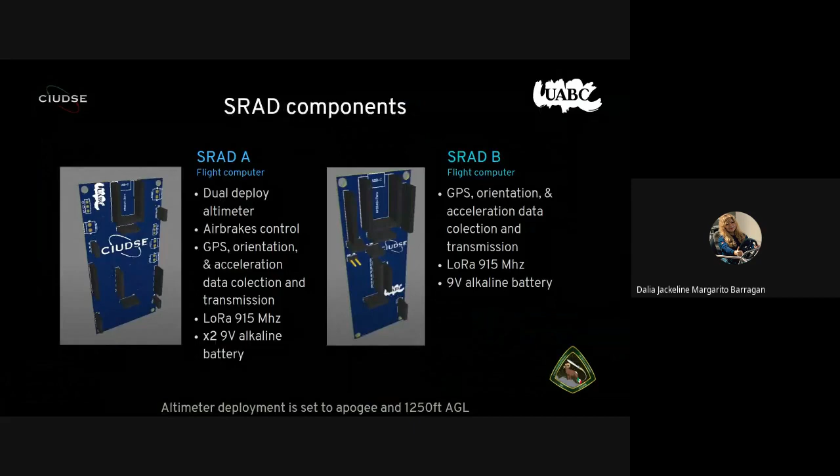Okay. Is it Q&A time?

Hello, can anybody hear me? Hi Jimmy, oh yes, we can hear you.

Do you have any questions about any area? But first, a statement: that's a wonderful presentation. I want to thank every one of you for being willing to get up and present, especially in English, which might not be your natural preference. But thanks for doing this old guy a favor and telling me about your rocket. The project is beautiful, the rocket is beautiful, it looks really good. I have very little to say about it other than how great it is. I'm proud of you for being willing to build that and bring it to New Mexico where we launch it and I get to watch it. This is fun.

Thank you so much for your comments, Jimmy. Thank you very much for the great hard work. We really appreciate it. I'm sure it's been a lot of work and you've done very well at it. Thank you. Do you have a couple of questions?

Okay, well, one is: is that the final color of your rocket, or is it going to be painted a different color before you take it to the launch?